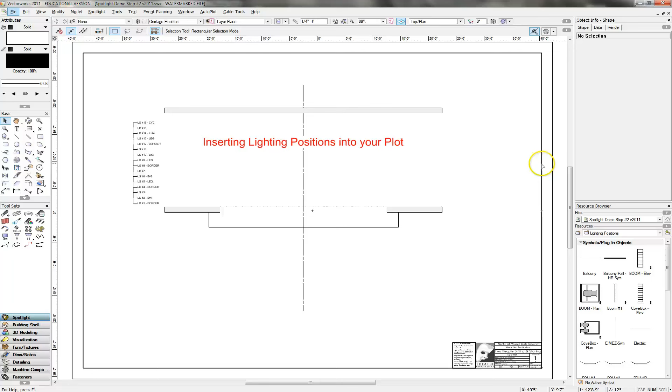The first thing we're going to do is insert the onstage electrics, and I'm going to show you how to make the positions. We're actually going to be making a hybrid 2D/3D position, so in case there comes a day when you want to do some visualization or photometrics testing, you'll be able to do that and you'll be set up and ready to go.

The first thing we're going to do is draw the first electric, which is a 2-inch pipe that is 41 feet 10 inches long. So we're going to draw a rectangle that's 41 feet 10 inches long by 2 inches.

So here's the start of our pipe. I'm going to put this into its place here. We're going to line it up, okay, and move it over so it's right where it needs to be. So here's where the first electric needs to go.

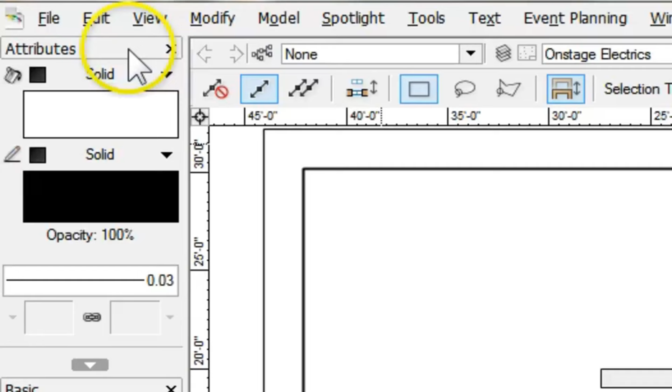Now we're going to make it hybrid, adding a 3D component to it. The first thing we're going to do is copy this rectangle, Control C, or Edit, Copy, and then use a command in Vectorworks called Paste in Place. That's going to paste it exactly where it was.

Now if you see, I will select, and you'll see up here in the Object Info palette there are two rectangles. I'm going to deselect, then select one of the rectangles, and now I have to extrude it and turn it into a big box.

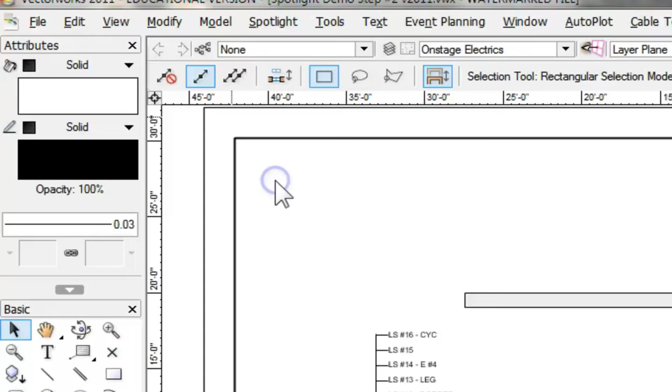You say, well, why are you doing that? Pipes are circular, yes, but for the purposes of this, for light plots, we just need something that's 3D and vaguely pipe shaped, and this will do. So we're going to extrude it, and we want it to be 2 inches. Okay, now we have an extrude.

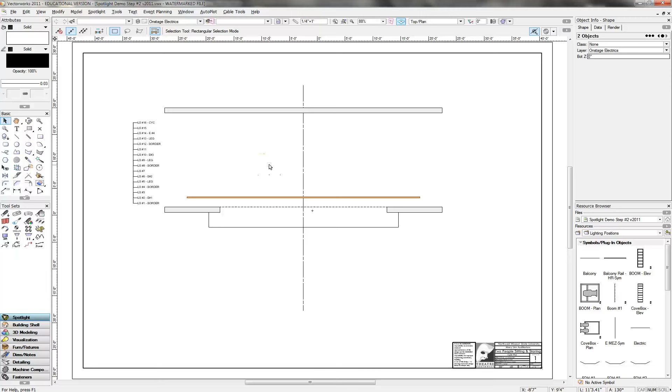I'm going to select both items again. To make a lighting position, the first step is to have both objects selected. Then I need to group them, which, as you all know, group is Control G. Now we have a group.

Then what I need to do is come up to Spotlight, Object Conversion, Convert to Lighting Position, and we're going to call this Elec number 1. Okay, and hallelujah, there we go.

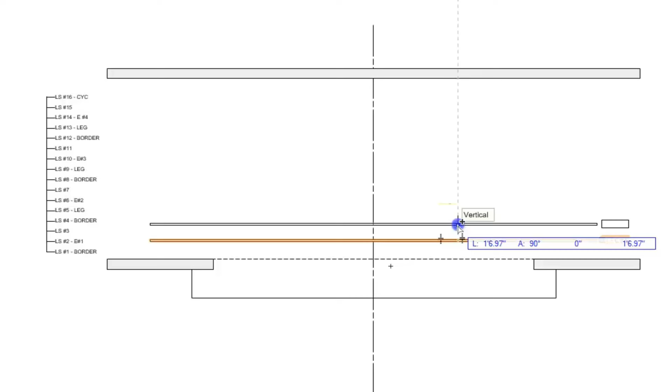Here's our first electric. Now to create the other electrics, it's just a matter of dragging them, copying them, and then renaming them. So I'm going to drag electric 1, hold down the Control key and the Shift key to lock it in place, and drag it right where electric 2 needs to be, right about there.

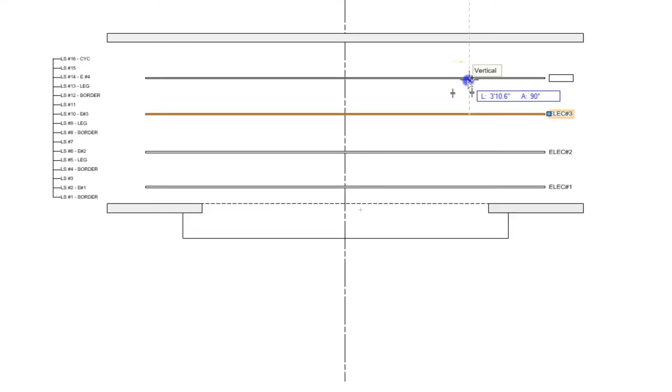Now you see this still says electric 1. I'm going to come up here to position name, electric number 2, enter, it changes that. We do that again for electric number 3, enter, and electric number 4, right here, enter.

And then we are also going to create a front of house position, and this can be pulled out. We'll pull it out to about here, and we'll call this FOH number 1.

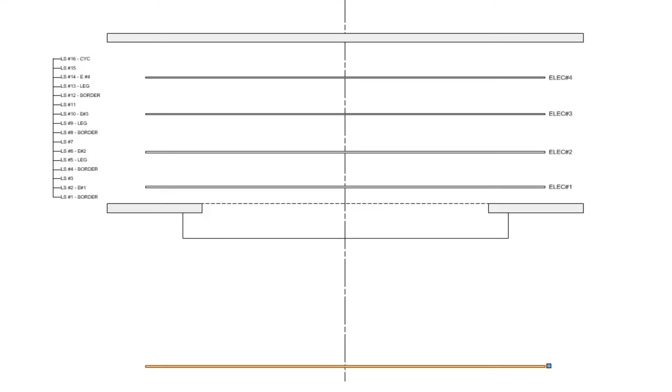Now if we were to do a 3D view of this, we would see that these guys would be sitting on the floor. You see up here under the Object Info palette the Z height? That's 0 right here. Okay, that tells us that these pipes are sitting on the floor.

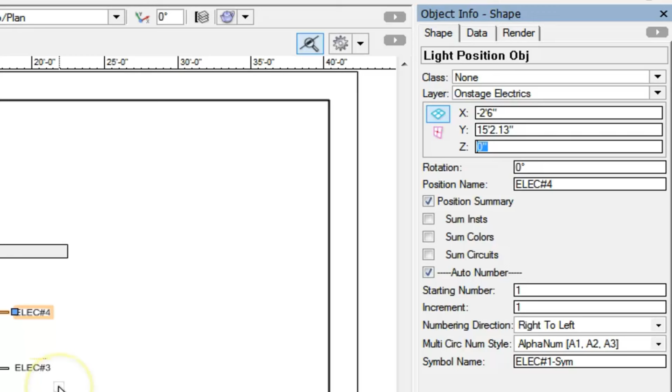What we need to do is give them a height, fly them out essentially. So I'm going to shift-select all of our stage electrics and set the Z height to 23 feet. Now it doesn't look like there's anything there.

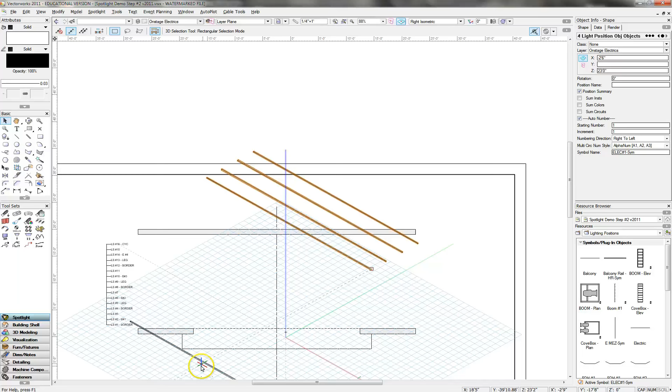Here, let's do a quick isometric view. Now you'll see it's a little bit hard to tell, but they're up in the air. Here's our pipe that we just drew, the front of house pipe. I'm going to come back to top view, and we're going to set the front of house pipe to 24 feet.

Okay, so that is our onstage electrics and our front of house electric. Now what I'm going to do is show you how to insert booms, the cove, and the box boom positions into this drawing. It's really quite easy.

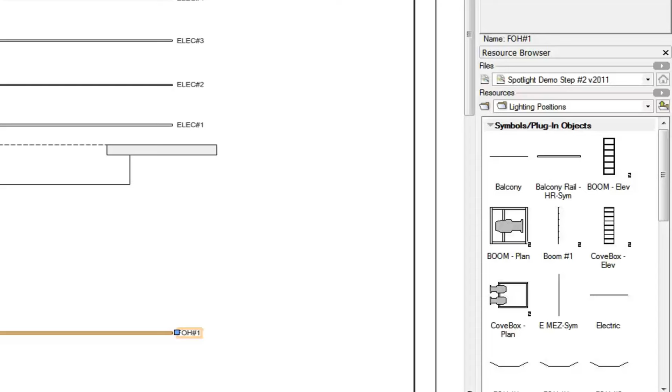Remember when we imported everything into our drawing from the last step, we'll click on Spotlight Demo. We'll come down here, and as you can see, there are all the folders we imported, and one of them is lighting positions.

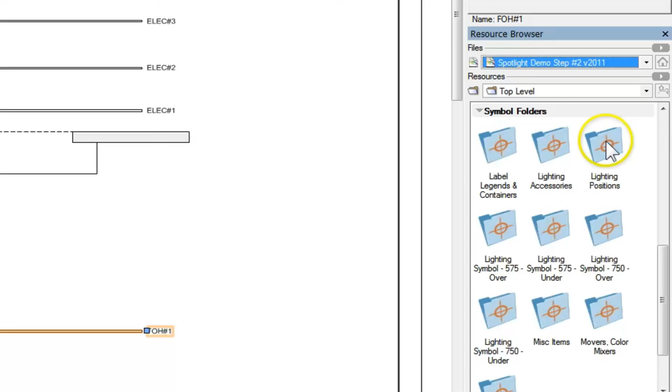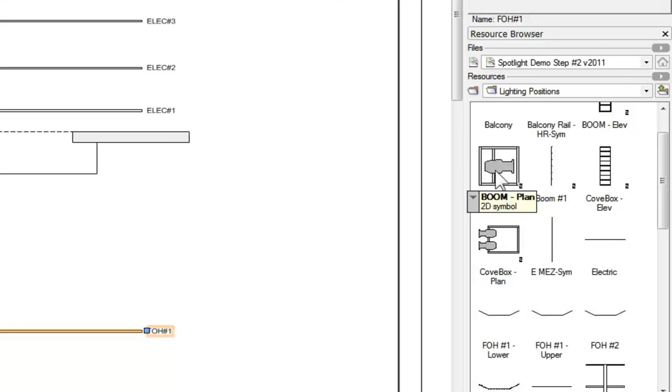First we're going to bring in a couple booms, some side light in this plot. Here is a boom plan, a top view. It's just a 2D symbol. All we're going to do is bring this into the drawing. You double click and put it where you want. I want mine to go right here. So now we have the 2D representation.

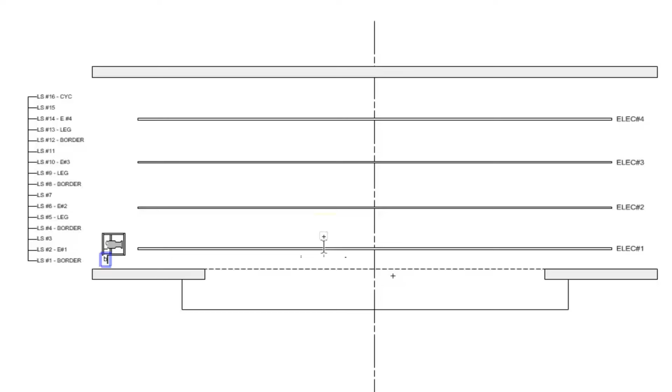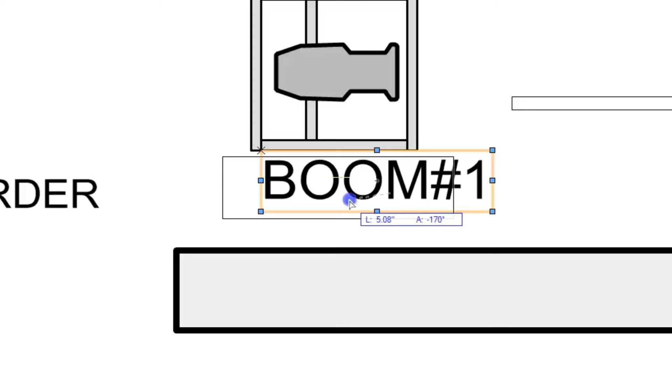Now we need to label this, and we're going to put some text down there: Boom number 1. I'm going to zoom in here just a little bit and clean this up. Boom number 1, all right, go back. So now that's the 2D representation.

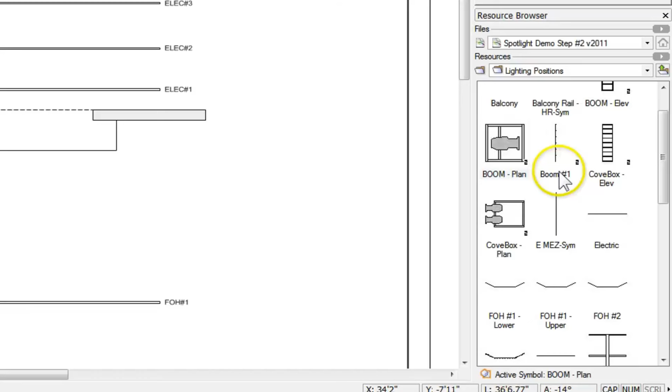Now we need to make the actual position for hanging. Right here is boom number 1, and we're going to make that boom number 2, 3, 4, 5, 6, whatever. So here's boom number 1. We just can't double click and bring this in—we have to bring this piece in as a lighting position. So I'm going to click on it, then right click, and up here it says make active. I'm going to make active, then come over to our spotlight tool set.

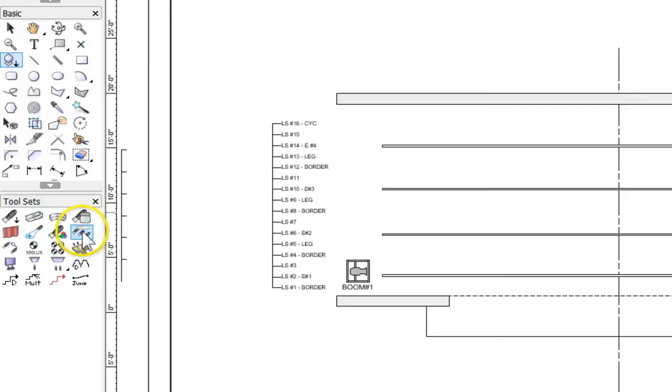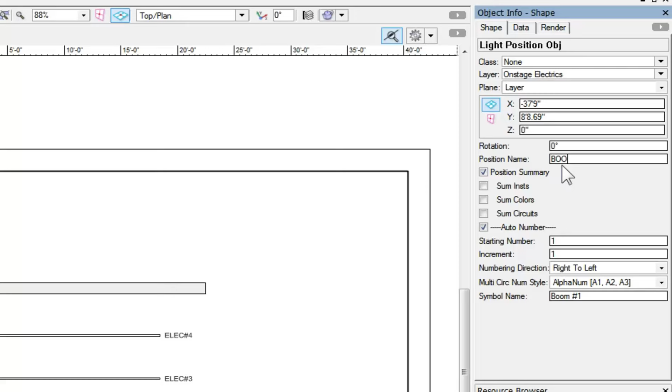Right here, lighting position object. I'm going to click on that and select where I want it. Now we can move this eventually. I click once and twice, and here's the front view of our lighting position. Now I'm going to name this boom number 1, and there we go. There's boom number 1. Now I can hang fixtures on here.

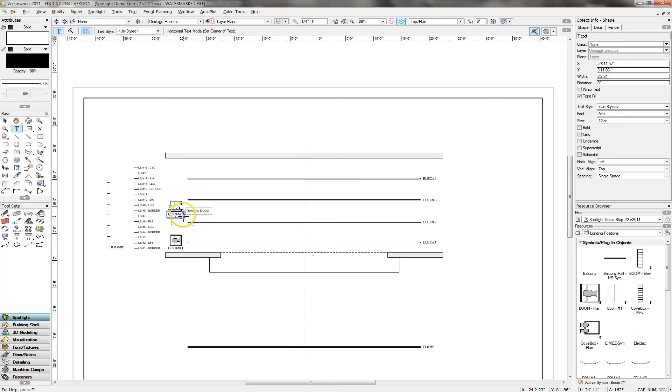Again, all we have to do if we want to make boom number 2 is copy it, and put boom number 2 there. Rename that to boom number 2. We copy this guy, bring him down just a little bit, copy this guy up—boom number 2. And we're off to the races. So that is how to install straight side light booms.

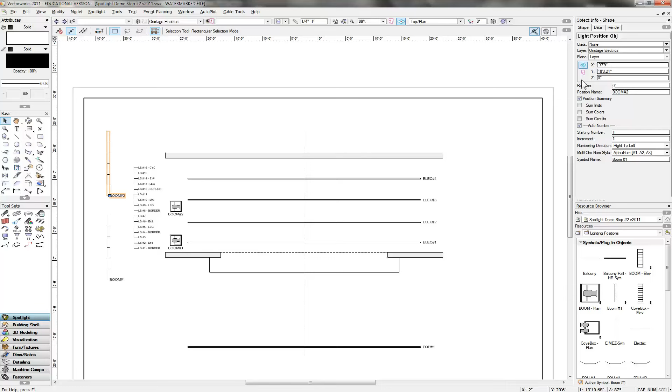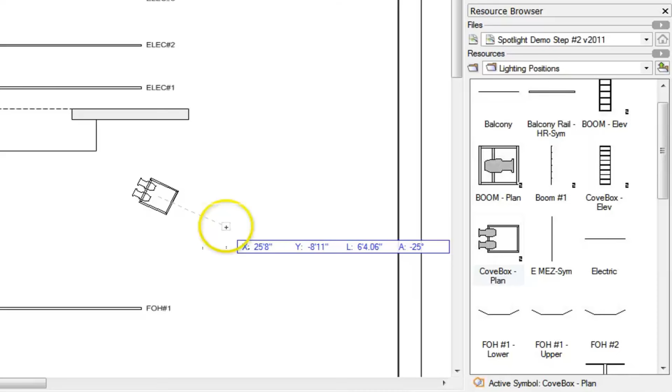Now I'm going to show you how to install a cove or a box boom, and that is exactly the same way. Here is our cove and box boom, and I'm just going to double click on it because it's just a symbol. I'll click once to set it, then adjust and click again, and there is our stage left box boom.

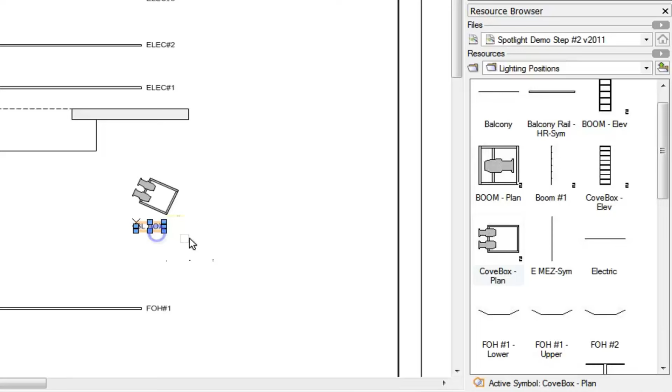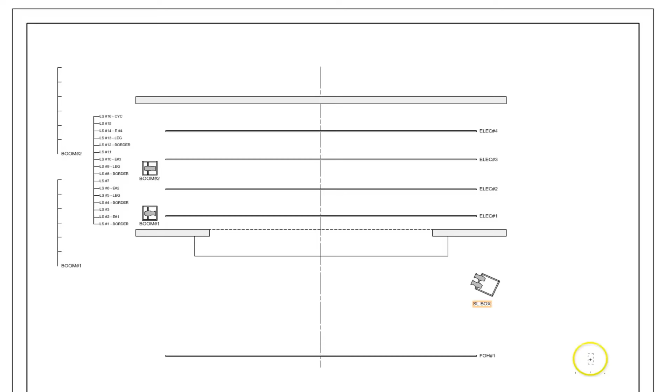Just do SL box. Now we want to come over here to our lighting positions and find stage left box and cove. Again, this is a lighting position, so we select it, make active, come over here to lighting position object. We'll go right down here for now. Click once, click twice, and here is our lighting position object for our stage left box boom. Again, we can label this stage left box, and we're all set to go.

The last thing I'm going to show you is how to put in a ruler. Rulers are really a nice addition to a light plot—it helps the electricians hanging. When you're creating your light plot, it gives you a little reference to go off of.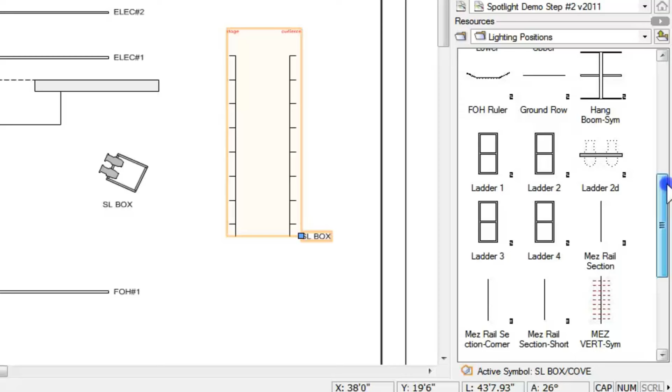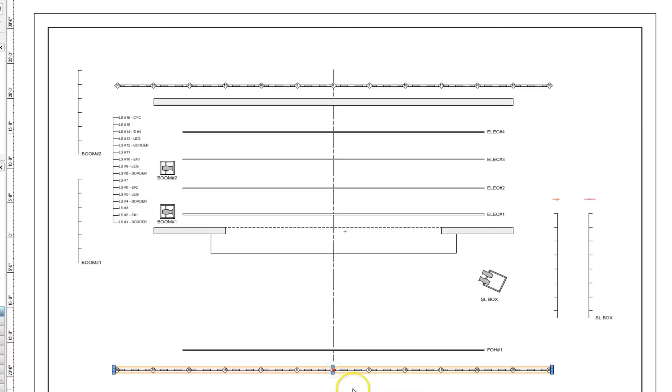I have a ruler here somewhere in the lighting positions. Right here, ruler. It's kind of hard to see what it looks like, but trust me, you can double click and it snaps to the center. So I'm going to snap it right here in the center. Double click, and it's imported. Then I'm going to put one down here for now. It's not snapping, but I'll get it close and fix it later. Double click, and now we're off just a little bit—I'm going to bring that down to right there, and that's pretty darn close.

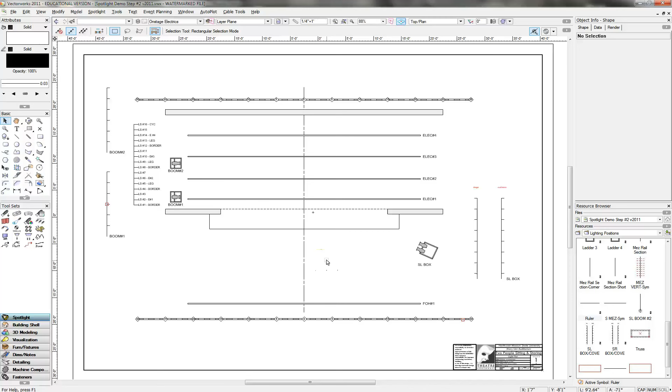So in this video, we have made lighting positions and hybrid symbols. We've inserted booms, the 2D, and the actual lighting position boom. We've inserted a box boom and the lighting position for the box boom, and we've inserted rulers. So now you want to work a little bit on your plot, and we'll be back soon.